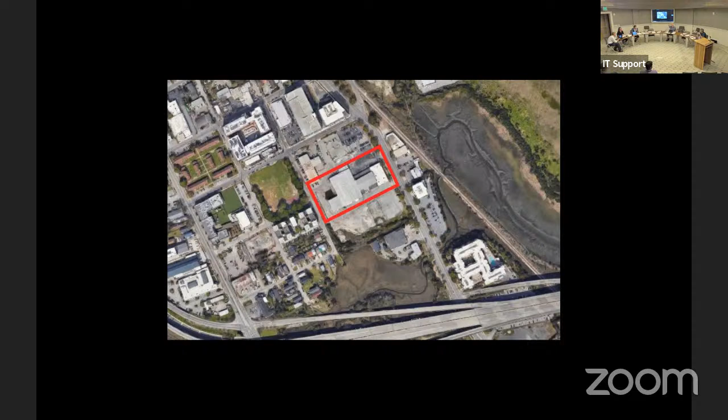And then now we go to the next one. This is the building in question being requested for demolition. And then now we're ready for applicant presentation.

The county owns this building and is proposing to demolish it. It's old and dilapidated, and it's presented all sorts of liability issues and such, so we've decided to remove the building. It's part of a future real estate agreement. That's really all I have for that. It's pretty simple.

All right, thank you. Do we have any public comment? If we do, please come up and state your name for the record. My name is Idris Live. I think it's a good idea and that we need to do it. Thank you. Any other public comment?

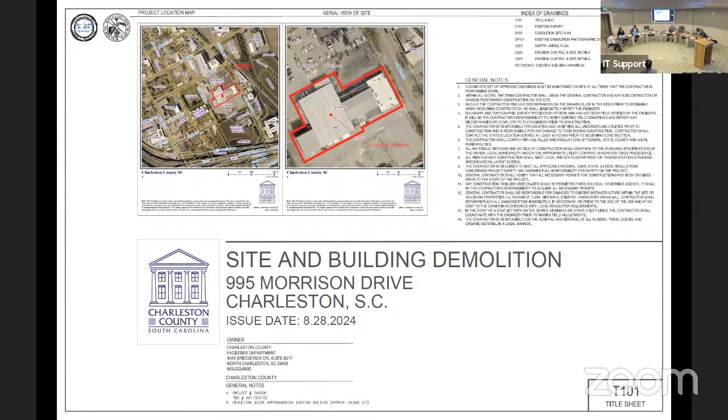All right, great. Staff comments and recommendations. The building is 51 years old and therefore meets the threshold for consideration as a historic building. However, the building is utilitarian in nature and has few, if any, historical, architectural, or aesthetic features. Most recently used as the County of Charleston City Magistrate and Small Claims Court and Hope Center, the building is neither architecturally nor culturally important to the city in any way that provides a compelling reason for its retention. There are no staff conditions for approval, and staff recommendation is for approval of demolition.

Any response from the applicant? All right, thank you. Board discussion. I move for approval. Second. So we have a motion to approve demolition without any conditions. Ready to vote? In favor, aye. All right, thank you very much.

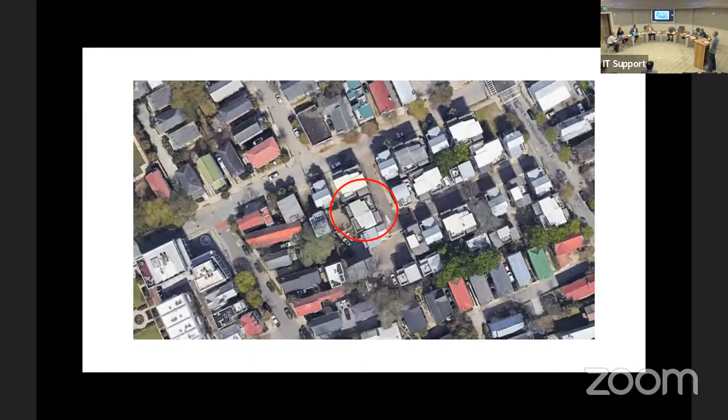My argument with the wooden doors first is they're not affordable. A steel door replacement costs between $2,000 and $3,000, while a wooden door costs between $10,000 and $12,000. Our community mostly consists of rentals for college students, probably 80%, and the owners of those units will do the bare minimum to those properties to make sure they're still collecting rent.

So they're not going to replace a $10,000 to $12,000 garage door, but they might replace a $2,000 door. Another reason is they're just not maintainable. That whole area floods every time there's any kind of rain, so the bottom of those garage doors will be like 2 inches underwater. The third reason is that, according to FEMA, we're not even allowed to have wooden doors in structures that are below the BFE, which is what those garage doors are. The material recommendation for a garage door from FEMA is steel.

So we're violating federal regulations by having wooden doors there. Thank you. Any questions? Did you get a permit for the work? We did this through Home Depot, and they said they were going to get a permit, but they did not get a permit.

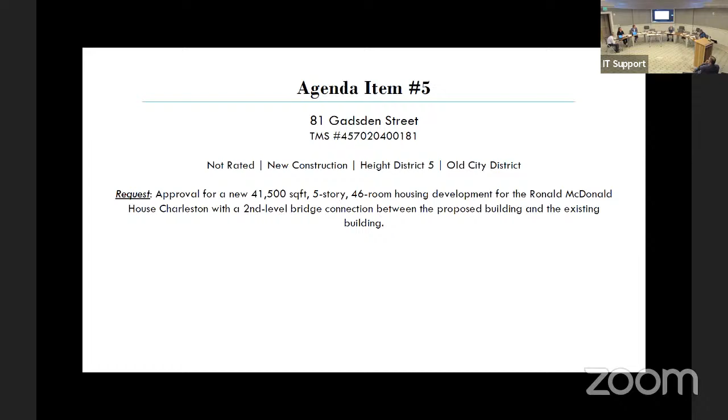All right, we are now at number 5, 81 Gadsden Street. Do you want to introduce it, please? Sure. It's a new construction in the Old City District, and the applicant is requesting approval for a 5-story, 46-room housing development for the Ronald McDonald House Charleston, with a second-level bridge connection between the proposed building and the existing building. This is the location, and then we'll be ready for the applicant presentation.

My name is David Burke with LS3P. We have our client here today. KP just wanted to say something real quick because she wasn't able to be here at the last meeting. So I'd like to introduce the project, and I'd like to go ahead and ask for the extra 10 minutes. Sure, if you want to get through a few items. So this will just reset again. Thank you.

So I'm Kathy KP Papadimitriou. I have the honor of serving as the CEO here in Charleston. The staff are very committed to this. We're all Charlestonians, and we thank you for the guidance you've given us so far. This is probably the largest thing the charity's ever done, and we really appreciate your endorsement. So we want to do it well, we want to do it right, and thank you.

Do I have control or do you? I just always try it, and then if it works, it works. I'll just kind of get through. We'll start with the big picture. I would say last time the message we heard loud and clear was simplify. We had a really good concept, but the execution, I agree, wasn't quite where it should be, and I think we learned that, and we've heeded that. And you'll find that even when the historic groups in the neighborhoods get up and tell you about the responses, they appreciated what you said, and they even offered some of their own thoughts.

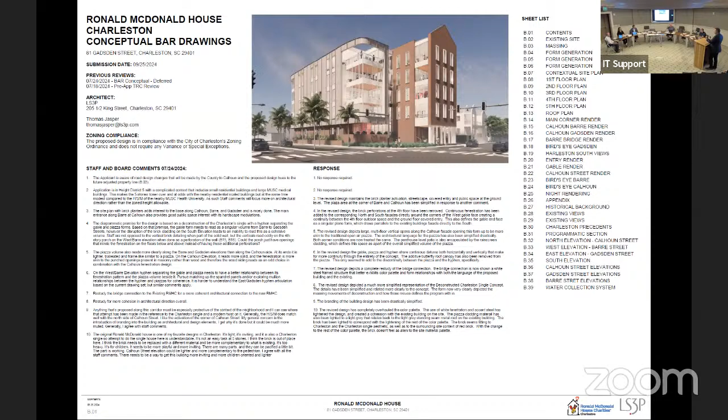Thomas is going to jump up here and tell you a little bit about the specifics. I'm going to touch on some of the big picture and refresh you on where we are.

This was that parti drawing we shared last time. It didn't change very much, other than we think we've done a better job of focusing on the public spaces being in the blue areas. If you think about the Charleston single, the deconstructed Charleston single, you have one bar, which is the main house, and the other bar, which would be the piazza.

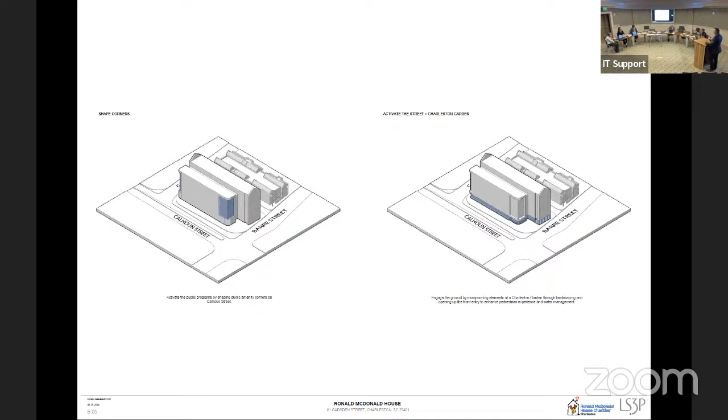Another important feature, we were able to meet with Dominion Energy between the last time we were here and now. The transformer that's powering the existing building is sitting in the drive, in what is going to be the new drive lane. We were all along thinking we would just slide that down closer to the existing building and let that power the existing building, and put a new transformer in a vault in our new building to supply it.

In our meeting with Dominion, they said, why relocate an existing one? We don't like to do that anyway. Let's build one that runs both buildings. So the way to do that is to put it in the area where we were going to put the one to run the existing building. The good news is that takes that transformer vault off of what was a back-of-house corner, and now we don't have that much back of house, so we have a little more flexibility with what we can do with that corner. That's actually turned out to be a very helpful thing.

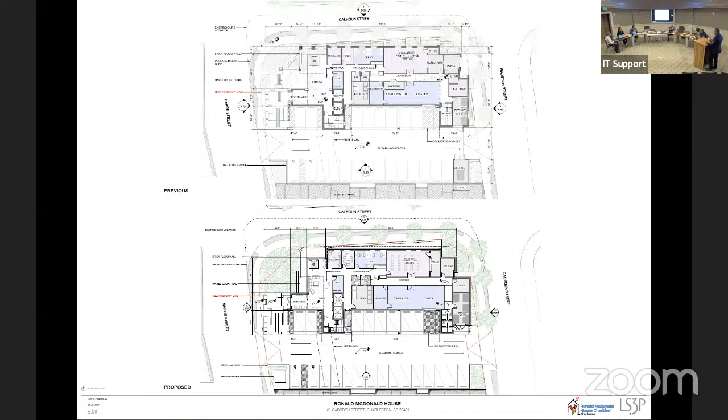There's not a whole lot of major changes on the plans going up the building, so I won't spend too much time on it. The function of every floor has stayed pretty much the same, with the exception of how we've treated the exterior skin. And the roof form, you'll notice the butterfly is gone — we got rid of that. We have two simple forms, one being the main roof and the other being the piazza. So Thomas is going to tell us more.

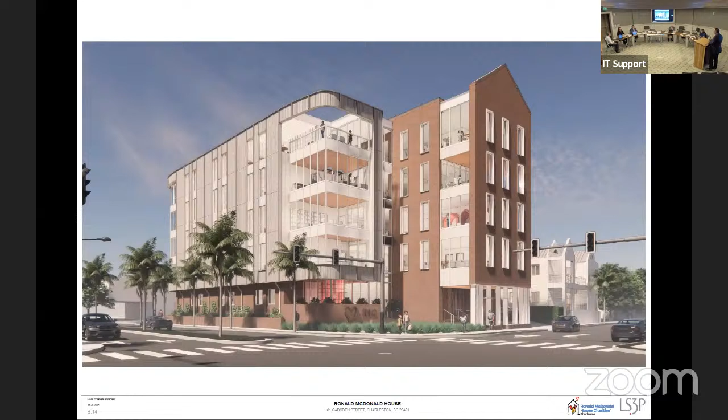I'm Thomas Jasper with LS3P. As David mentioned in the introduction, I think the overarching commentary from board and staff was to simplify the design, simplify both the color palette and the form and massing. So we looked to achieve that through a clear identification of the deconstruction of the Charleston single, which was our overall concept — to cut back on a lot of the ornamental pieces and branding elements that didn't necessarily relate back to the original concept, and to create a more cohesive campus through both color palette and formwork relating back to the existing Ronald McDonald House.

So this shows the change from previous to proposed on that main Barre and Calhoun corner. One thing in simplifying the deconstruction of our Charleston single, we looked to break that down into two big architectural movements: one being the pulling of the piazza off of the gable form and revealing the glassy hyphen that is the projection of the circulation running between the two forms, and then to pull open the gable face at the main entry.

Doing this pull at the main entry created two things. One, it allowed us to create a relationship with the entryway to the south of the existing building. And it also allowed us to relate that fourth floor porch patio space that ownership wanted to the openings below and above.

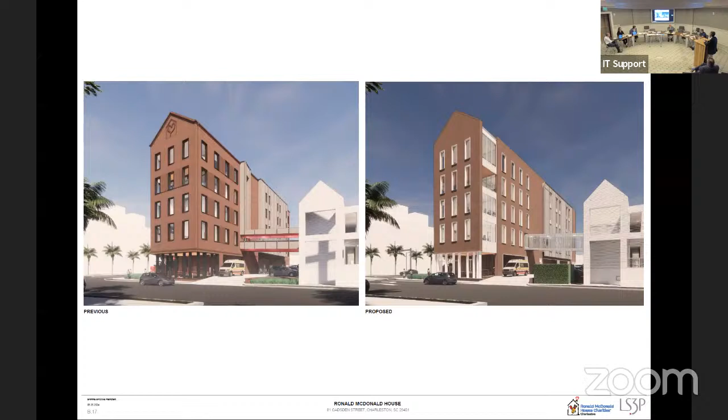In order to answer the board's comments on extending that brick, we pulled this material off the face and made it more of a cladding screen element. We also pulled it down from the parapet and up from below so that the brick can continue through above and below it. We added this rendering to show the relationship this has to the north facade material and how it's piercing that brick form.

At a request of the Harleston Village Neighborhood Association, we added these two renderings, views looking north along Gadsden and Barre, just to understand how the building relates to its neighboring buildings and form.

At the entry, we continue to peel back the brick fenestration or brick detail work, as well as a lot of the kind of ornamental steel.

We moved the folly at the plaza. We cut out some of the more superfluous brick staircases and simplified just the entryway in general.

And the planter wall that runs along Calhoun now wraps that corner and becomes an opportunity for signage below, but also matches the same profile as that of the piazza. So it's reading with those vertical datums and relating to that, as almost a part of that form that's been pulled off of the gable.

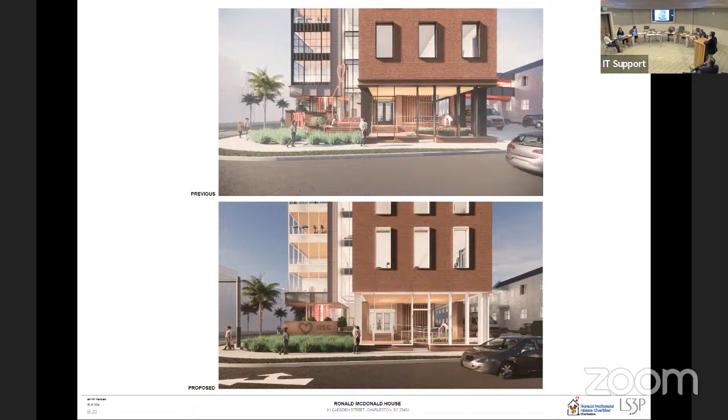We also, in response to the Preservation Society, in order to ground this entry face, we added heavier steel members at the corners, just to give it to carry some of that weight of the facade above.

Moving up that same facade, we removed the perforated brick off of the fourth floor patio space and cut back a lot of the more ornamental detail on that gable rake condition, simplifying and minimalizing those cornices.

The view at Calhoun. One of the positive elements was the planter boxes that we created along Calhoun Street to activate this street. So we maintained those, but simplified them slightly just to relate to the changes in the architecture throughout the rest of the building.

And you'll see we still are planning on keeping the downspout system and gray water retention, but it will now just occur behind that rain screen.

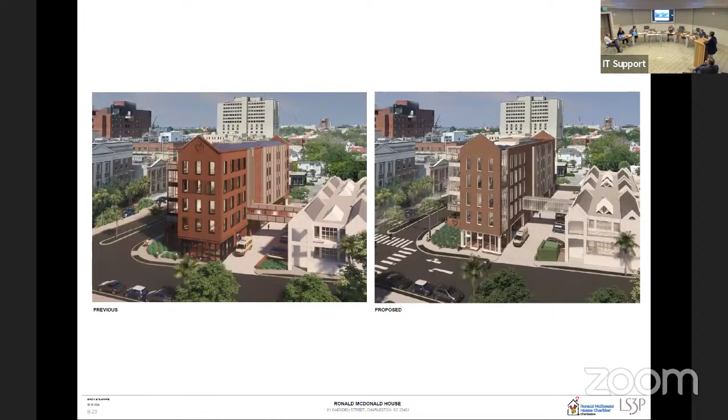View from the southwest, looking on a view of the kind of the main plaza and aerial, and then a night rendering of I think David's going to.

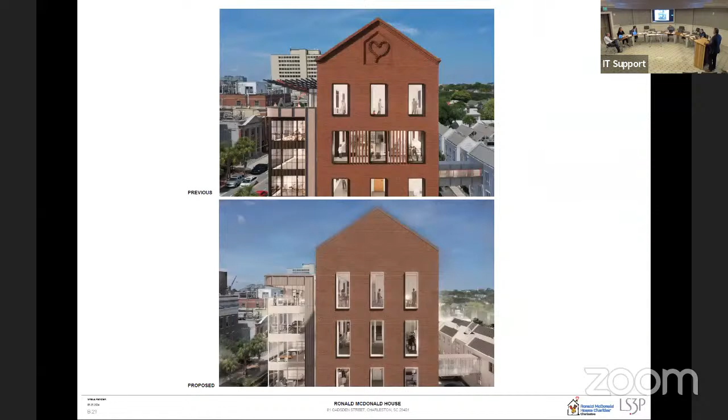I think everything else is just supplemental stuff that you don't necessarily need. So I think we've got everything that you need for the review, so I think we'll just stop there.

Thank you. Yeah, any questions from the board? I do have a couple questions.

You're gonna kill me about this one. No, I wasn't here for the last one, but you set this up to be a piazza and a single house, but you've got a piazza on the north. It just seems, and maybe it's because the lot won't allow you to get everything you want, but it seems like you put the taller part on Calhoun and the smaller part next to the lower buildings, and then the piazza would be on the south.

It's deconstructed. It moved around. Okay, all right. I had to ask. All right, is that your answer? That's fair. Okay, all right, so the next question.

So I see a lot of pink lines in there. What's going on there? Inside the building? In the old one, you had things happening that now we just see it and don't know what it is. So, we did have a lot of red lines before. We were trying to bring in the color of the Ronald McDonald House into some of the pieces. And at our last meeting, we were kind of asked to tone that down a little bit. We can revisit it, but we wanted to just talk about the architecture, not get into branding and all that right now. Some kind of signage or something? Is it neon? What is it? No, let me see if I can. It just, I can't figure out what it is.

Right there, that is a toy closet. And it's part of the story of the Ronald McDonald House. When you come there with your family, you walk in and the first thing they do is allow your child to go pick out a toy out of the toy room. It's usually done in some sort of a way that it's an experience. There's a magic to how you open the lock of the door or something, and it's something that we wanted to celebrate a little bit.

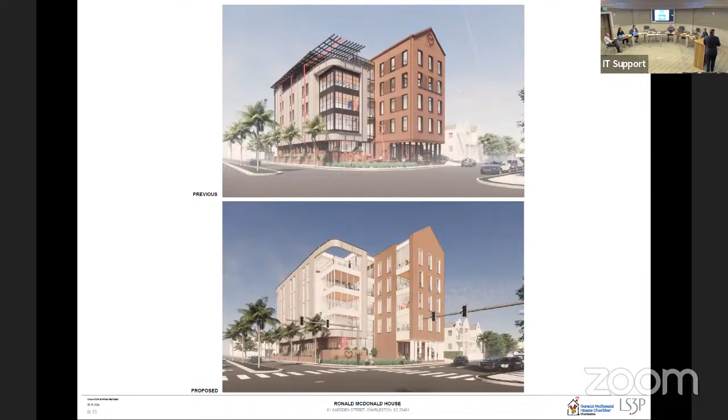Got you, thank you. So, Mr. Chairman, it looks like each one of the floor heights is 12 to 13 feet, that sound right? 12. Well, and you need that much. 12 is flood line, that's where we have to get to. See if I can get to the elevations because we have those.

There we go, it's 13 and a half. Design flood is 13 and a half. That's right there, that's the datum line that we're having to follow.

That's where the bottom of the windows are. Each floor above that is about 12 to 13 feet. From grade to level 2 is 15 feet, and then each one above that is 13, 12 feet. You get to the top, it's a little bit more. At the very top floor, I think we needed an extra foot.

But the question is really for me because it's just a really tall building and it's just part of the design. Is your interior demands the need for 12 feet? Right, 10-foot ceiling, that's what we're needing to get all the mechanical equipment and stuff we need in the building.

Yep, thanks so much. Just a comment from me. I think staff has said this, but there were questions. I just wanted to point out, I believe, well, you hadn't even talked about this yet. Sorry, I'm ahead of myself. It's a clarifying question.

Can you make it smaller, so that you can see the whole thing? It's so small you can't see it at all. How about that, does that work for you? It's a little delayed - what you are seeing is the frame, let me back up a couple more slides here. There is a roof plan that is easier to see.

Actually, that one's good. We're trying to capture as much of the mechanical equipment as we can in that space. These are actually solar panels, but they're to heat the water - they're not creating electricity, they're just heating the water. So that's our strategy. It may push and pull as we put equipment in there, but we're trying to hide it as much into the building as we can.

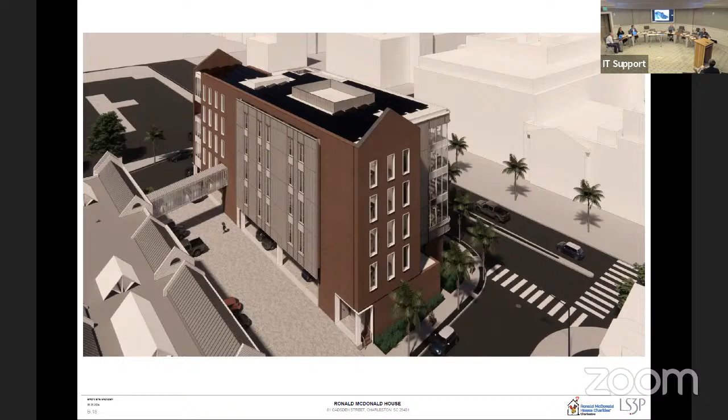And we've also been directed by the fire marshal that in the flood zone now, we can't have things like fire pumps and stuff like that. So the reason we need some of the height here is that we're actually going to put the fire pump on a pedestal underneath. It's not there - it's actually there, but I don't have a page number, it's the one that shows the streetscapes - the Calhoun Street proposed project.

Is it a black and white drawing? Yeah, it's this one right here. Okay, I get it.

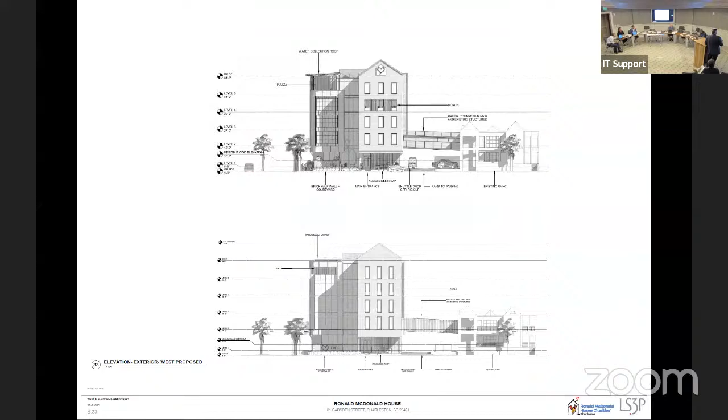This one? Yeah, that's it.

It's not on the table right now, but if you look at that top where Calhoun Street is, and then this project, and then you look to the left, it really is a significant height. I appreciate you putting this in there because that's an accurate reflection of how it really is. It balances off on the north side. I get it, but then you see them jumping across Calhoun. If you think about that round and down, that's that little white on the left. We built the study model so you really could see it in its context. It's more three-dimensional here, and I think that helps too.

Eddie, look at the model. They put a lot of time into the model. Stand up, come around to the front. They brought models in. That's scaling, yeah, across the street.

That's why it's one. When I was looking at that, this is just an exact illustration of that, or vice versa. So you do this, and that's the first building you get. You want it to be on the other side of Calhoun Street, and it's not. It's just what it is.

Thank you. Yep. All right, thank you.

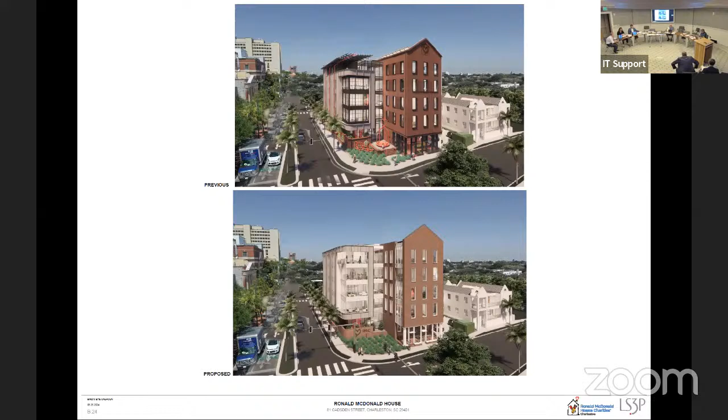Before we start the next one, we'll let them. Wait, Hey David, you gotta take your model, because we got other applicants. We forgot all about it. There's another applicant that's gonna give a presentation, and they can't stay here during that. I can take them briefly. Hold on, I'm just gonna put it behind that lectern.

That's great, thank you, Debbie.

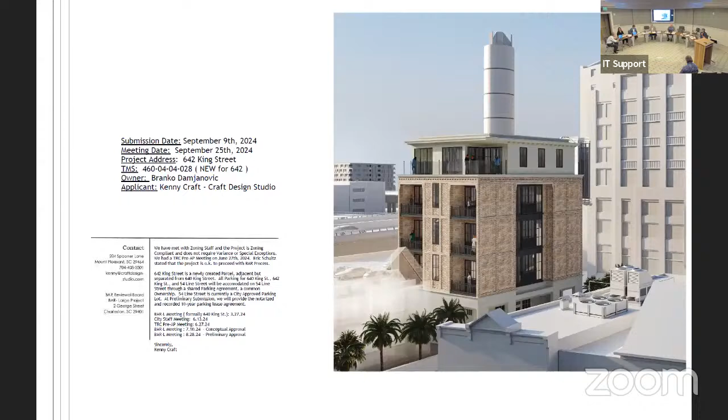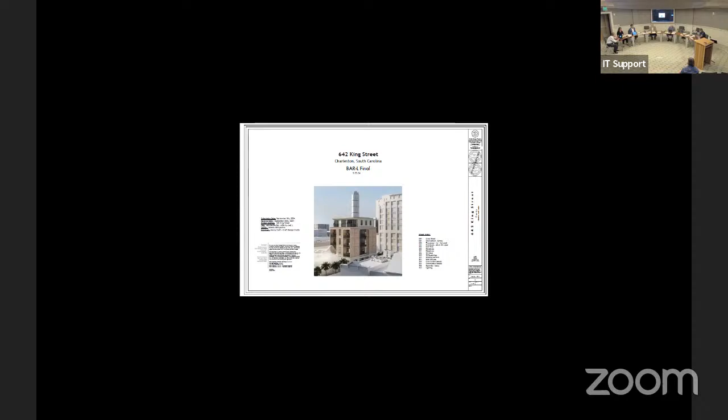Welcome back. All right, we are now to item number 6, which is 642 King Street, here for final approval. Item number 6, 642 King Street, is new construction in the Old and Historic District, requesting final approval for a new 5-story building.

You have to go back one just so we can see. There we go, and this is the location of 642. Now we're ready for the applicant presentation, Mr.

And I know you have things to hand out, so you can do that first if you'd like. Okay.

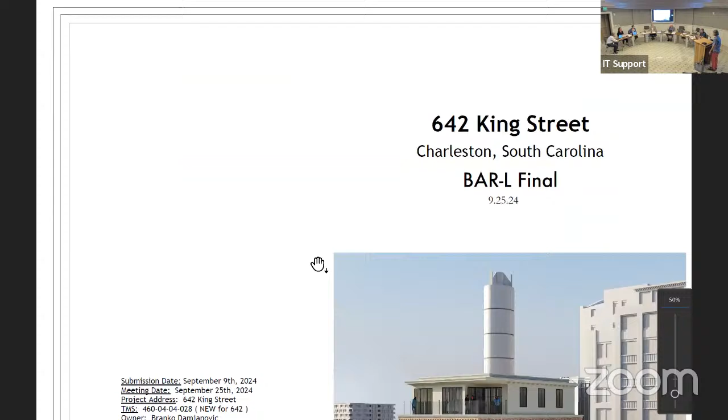Kenny Craft, architect, Craft Design Studio, and yes, I have some material samples. I'll go ahead and pass it around. Start on one end.

All right, we've gone through conceptual and preliminary, and we're at final, so I'll skip ahead on most of this and get into the details. Context on the site.

Might stop here for a moment on the elevations. Exterior material-wise, starting from the base, we have brick with stucco that will be painted this alabaster cream color, which also matches the aluminum clad color at the top. The brick in the middle, this magnolia bay, is kind of a buff color, and we've chosen a grout that's a lighter color which makes the brick more uniform and consistent. The windows are a dark battleship gray window clad color.

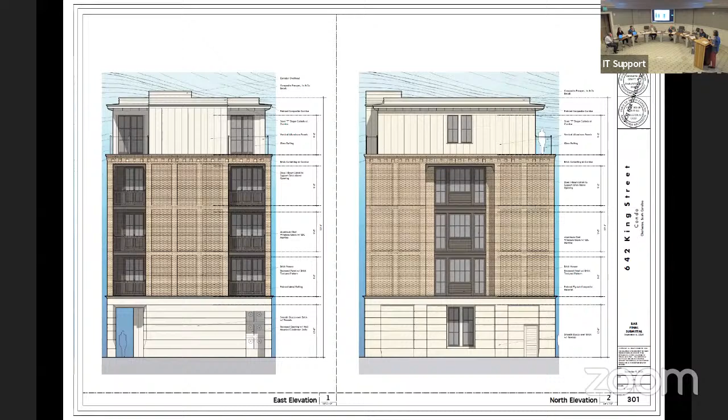Some of the materials I'm passing around are this fly ash composite material used for details, particularly the cornice, matching the same color as the aluminum cladding. Some of the blow-up details show a fair amount of brick corbelling as it transitions to the penthouse level at the top.

Rendered view, building section, cutting through the balcony side and then a regular wall side, then a recessed lower level. The cornice and penthouse level have vertical aluminum panels in this alabaster cut, and at the cornice there's a T-shaped steel purlin detail, also all in this same alabaster color. The cornice is made of this fly ash material, which is great low maintenance but also allows for a bit of detail, all consistent in color with the aluminum cladding.

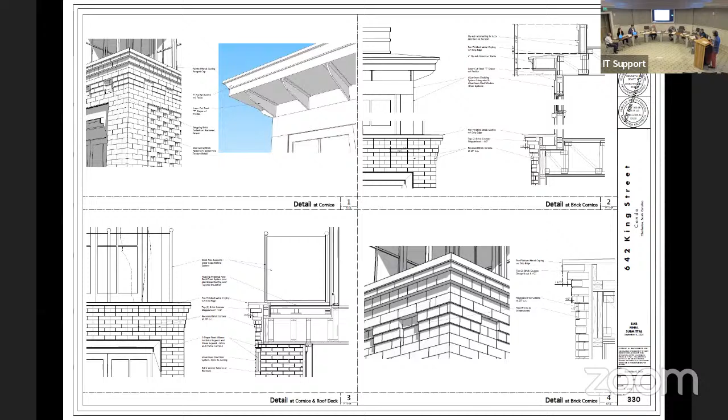Getting into this detail with the brick, there are some good shadow lines on the brick, speaking to Charleston's brick heritage, with fields, zones where we have an alternating brick pattern with shadow lines. This shows the magnolia bay buff color, mostly whitish but with some warmer tones, and the grout color picks up the lighter shade so it looks more uniform and consistent without a lot of busyness.

Some of the aluminum cladding details have nice recessed groove lines that allow you to turn the corner nicely without a bunch of joints and fussiness. Not too complicated on the window or light fixtures, just nice simple pendants—sorry, sconces—at the balcony locations and along the bottom.

And again, the samples are being passed around, so take a look. I'm personally pretty excited about this fly ash material—low maintenance and allows for a couple of details without actually using wood, with nice color matching to the aluminum. Open to any questions or comments.

How does the top floor roof deck system drain? Is it coming inside? Good question—it's all internal.

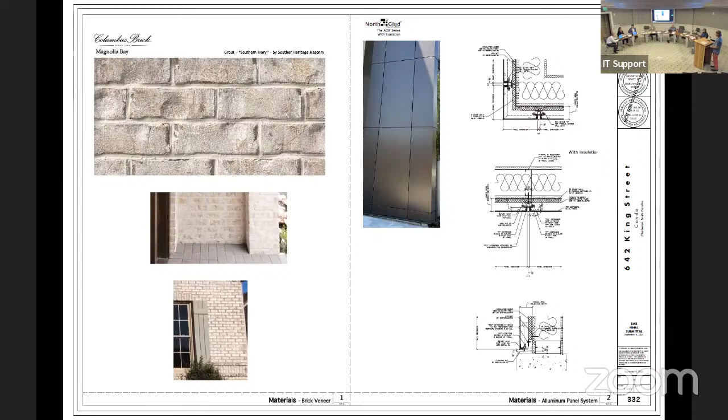The applicant has provided wall sections detailing brick and metal work related to construction of the building in general and the upper floor penthouse specifically, as requested by the board during the previous review in August. We have no issues with anything shown to us, so staff conditions for approval are the more traditional boilerplate ones. Condition number 1: any modifications to approved drawings required for code or fire department compliance, or contemplated during construction, must be approved by the BAR prior to undertaking changes. Any modifications or substitutions to materials or elements approved at the final BAR hearing must be specifically noted, reviewed, and approved on the mock-up sample panel. Number 2: deviations from previously approved submissions, if determined by BAR staff during or after completion of construction to be a downgrade of the quality of the project and inconsistent with previous approvals, are not approved, whether noted or not by staff during review of the permit drawings. Staff recommendation is for final approval with board and staff conditions.

Thank you. Any response? All right, great. Moving into board discussion.

Well, I'll start. I think, and it's nice for me to actually see a project more than once because I'm only here once in a while - I think the details are great and really well done. I wasn't here for the first review, but I think you've done a great job with the development, and it's nice to see things figured out like this.

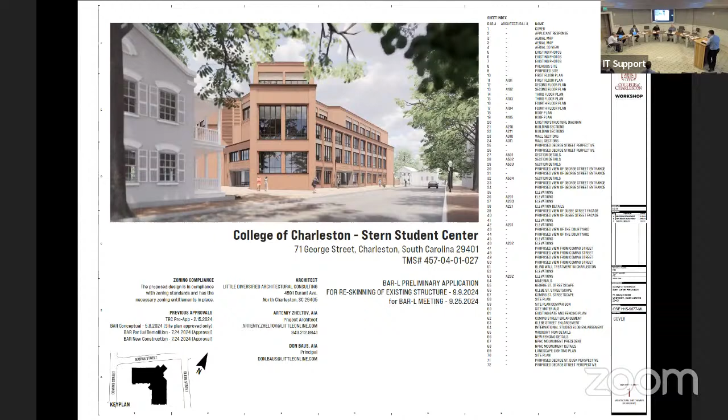We're excited to share the further details of our design, and we hope this will be a dynamic, active hub at the center of the campus, for the staff and local community. Last time we presented for conceptual, we did not receive a lot of comments, but I will go more into detail on how we addressed the comments we did receive further in the application. To catch everybody up, Mr. Matters and Mr. Watkins were not here at the last presentation, so I'll walk through the floor plans and the site.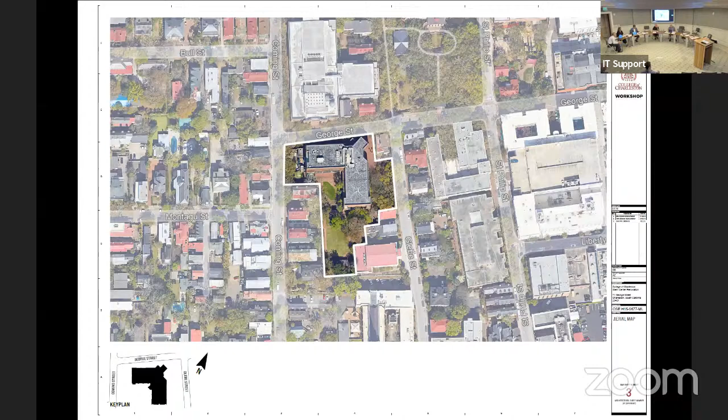It's located at the center of campus, diagonally across from the cistern, with George Street to the north, Coming Street to the west, and Glebe Street to the east of the building. From this area, you can see Grace Church down to the south, the Harleston Village neighborhood, and then the larger College of Charleston building at the heart of the campus.

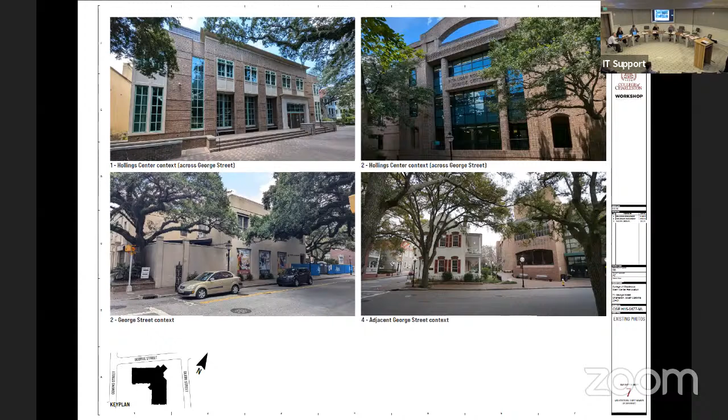These are existing pictures of the building as it sits now. These were views from George Street, the Coming Street facade, the Glebe Street facade, and this is just context of the site. These two buildings are directly across the street: the Hollings Center, which is the original building built in the 70s, and then the Hollings Center addition which was added about 5-6 years ago.

Scott Parker will talk a little more about the details of the site, so I'll breeze through it — there wasn't a lot of change there. In terms of the floor plan, it hasn't changed much either, so I'll go through it.

The existing building currently houses a pool, so we're filling in the pool with a multi-purpose room, a double-story multi-purpose room. There are two restaurants and a dining area for the students on the ground floor, which spills out to the south onto the green. These are construction documents for the current application, but there weren't any changes.

The second floor houses student government organizations and meeting rooms, and down on the south wing there is the double-story multi-purpose room. The third floor will house the fitness center for the college — again, no major changes in the floor plan program. The fourth floor will house the admin suite and a larger ballroom-type space for student gatherings, and again no changes.

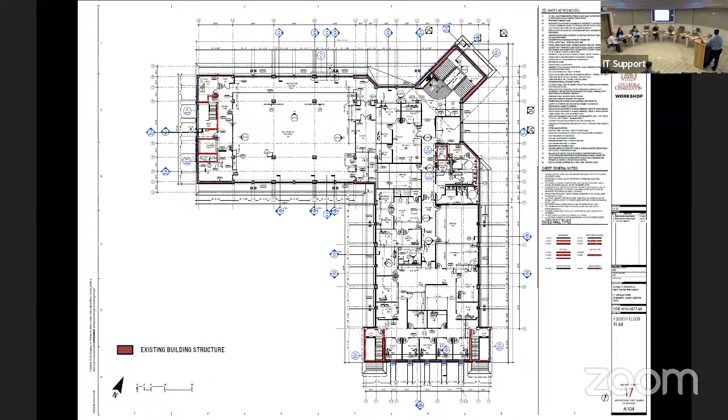These two building sections show the extent of the reskinning effort. As you can see, a lot of the exterior is being added — 99% of it is new, with just the building structure remaining.

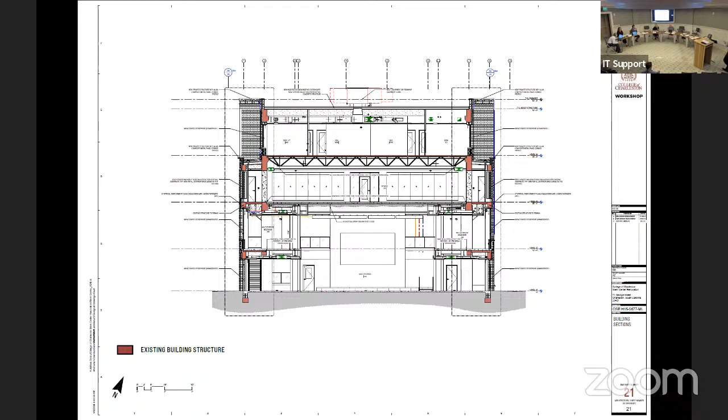Wall sections: typical around this building, we have the fourth floor stepping back from the street facade. We're adding a consistent parapet at the third level that helps with draining that roof and creates a nice architectural feature. Also, different from the conceptual application, we reduced the parapet at the fourth level by 16 inches, so the building is actually shorter.

This wall section shows the sloped glazing — that is the only location where we're keeping the original form, the original glazing of the original building. The glazing itself is not original, but the form of it is.

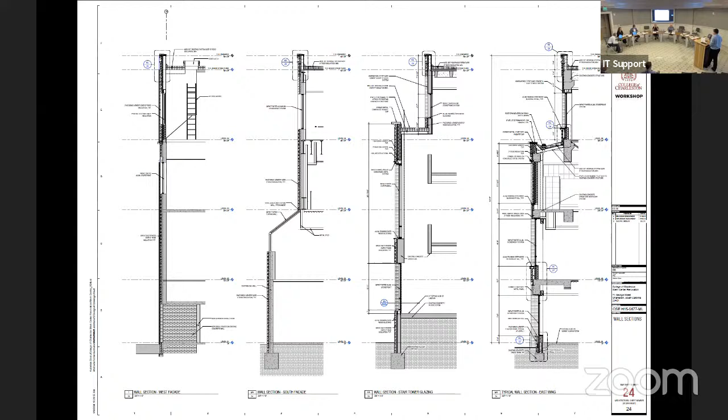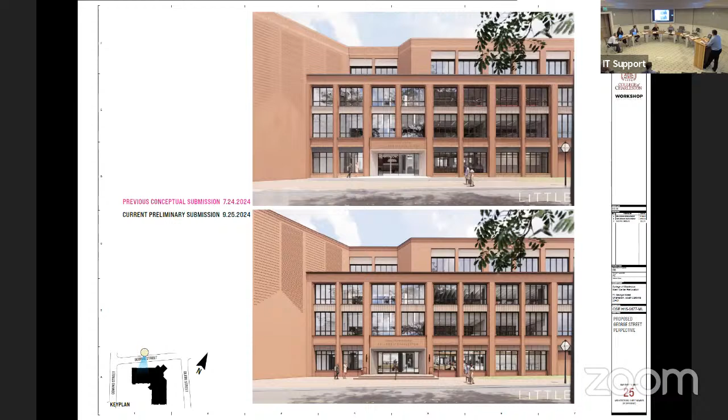Now let's go through the previous and current renderings. For comparison purposes, we haven't made a lot of changes, but the major change is that the board requested a stronger base. We studied breaking up these verticals with a stronger horizontal, but to keep the vertical proportions we decided against it. You'll see in the closer details where we're keeping the header course just a step away from the vertical plane. We also added vertical reveals into the spandrel panels on the ground floor and changed the color so that the ground floor reads taller.

And then lastly, on this facade, you see we changed the detailing at the fourth floor parapet. The next three slides go through the details of the typical bay.

This is the ground floor window. You can see the aluminum composite panels. That's where we added the vertical reveals.

Between the second and third floor, one change in materials, a conceptual application in this spandrel area between the second and third floor showed GFRC panels. We will replace it with fiber cement planks, rain screen.

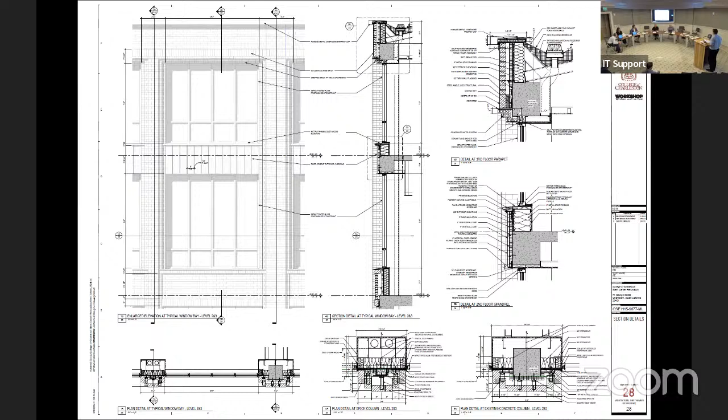And then the fourth floor, it's the same. We have a window in the existing opening and then a stucco spandrel panel.

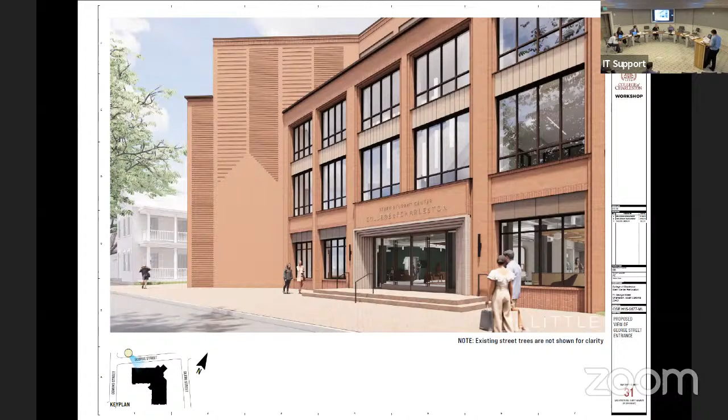Again, these are details of the entrance, the brick stepping back, and then the core bolt header to the door with a concealed lintel system holding up the brick attached to the existing structure.

Similar application, no major changes on the George Street facade tower, stair tower, just some further brick detailing. This is a George Street elevation.

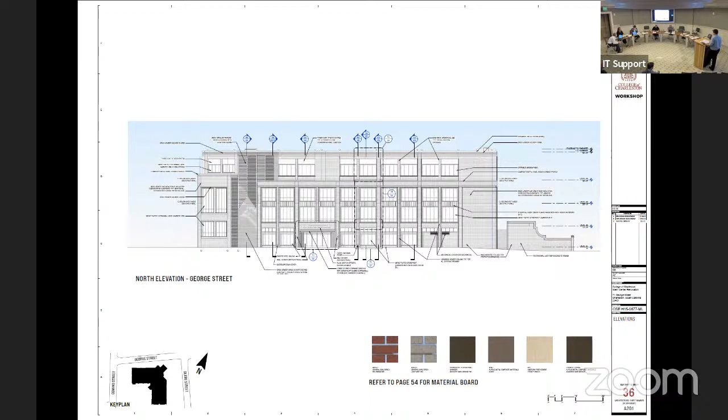I'll talk more about the materials in our when the material palette slide comes up. And then this is a George Street tower elevations. And then we're showing the brick detailing.

This further helps to explain how we're making the pattern. It's a half inch reveal in the pattern shown of the brick courses, alternating courses.

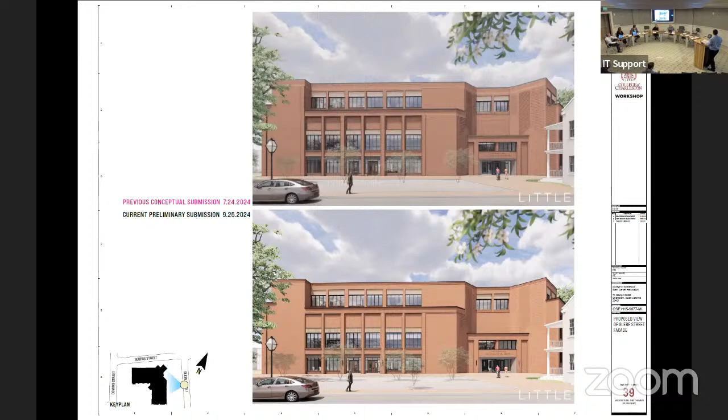Glebe Street facade, it's all, again, all the same changes that we did to the typical bay. Minor change at the ground level, change to the composite panel, additional vertical reveals, and then detailing at the fourth parapet.

Elevations. And then this view you can see from the street, but it's the rear of the building, south facade, the green. This is where the multi-purpose room spills out onto the green. You can see all the new additional glazing at the ground level.

And again, it's the same changes that we've done to a typical bay. That's a view from Coming Street.

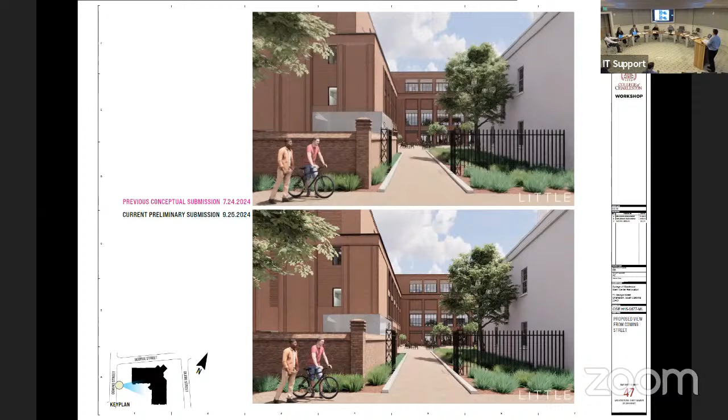Scott will talk a little more about it, but we shifted this wall, back of house wall. You can't see it in the rendering, but we shifted it back by about 16 inches, so it's a wider walkway.

And lastly, this was the elevation that gave us the most trouble, and we received the most comments. The comments I received from the staff and the board were regarding this elevation.

Unfortunately, there are some programmatic elements that are locked on the floor plan. We tried to address the staff comments by adding additional glazing. You can see additional windows at the fourth level, or the larger windows at the stair tower.

But due to programmatic elements, we weren't able to add modulation to the facade. The only modulation is the brick detailing, the brick piers that are recessed.

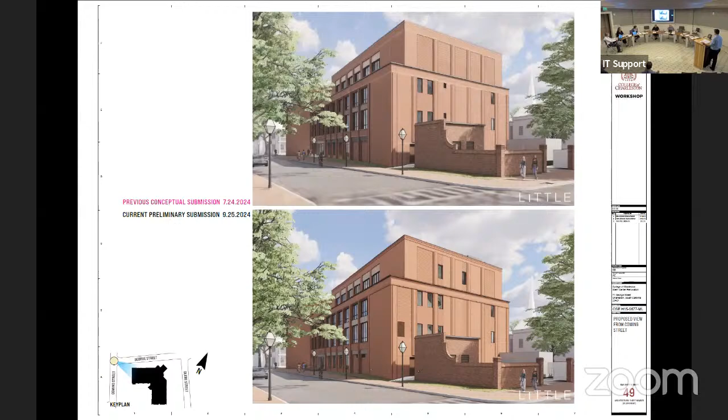Again, that's a view of the Coming Street facade, the west facade. And the way we're treating it is not really typical to the way it's been treated through different historic areas in Charleston.

This is the south facade. And then the material palette, we have real samples, but you can see it on the screen.

This is that fiber cement planks. They got variation from plank to plank, so it will give it a patina look, a glass, and then dark bronze

anodized aluminum glazing. And then that's the composite panel that's at the ground level, the suede. And then these are the sconces that are shown in the render at each entrance.

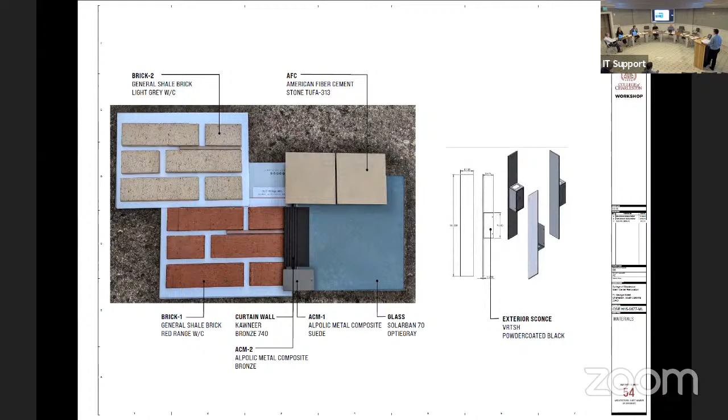These are just streetscapes, in case you all had any questions on fencing. And then I'm going to let Scott Parker talk about the site.

Thank you, Scott Parker with Design Works. So, before and after, the slide on the left is what you saw the last time we were here. Slide on the right, a few minor changes that are being made.

We're proposing some additional planting along the Glebe Street edge, and additional planting in the courtyard here. And what I really want you all to focus on and get your feedback on is dealing with one of

the programmatic elements, which is that this space has to be fenced, and the college needs to be able to control the boundary when they have certain events there. So the entire perimeter needs an operable fence and gates.

What we're looking at is two really key points, one on Coming Street, where there is a beautiful historic gate. Artemi mentioned that we're having to extend the service area in the back further to the south, so we've pushed back a little bit so that we can preserve most of the gate and fencing in that location. But there's a section of it that has to come out.

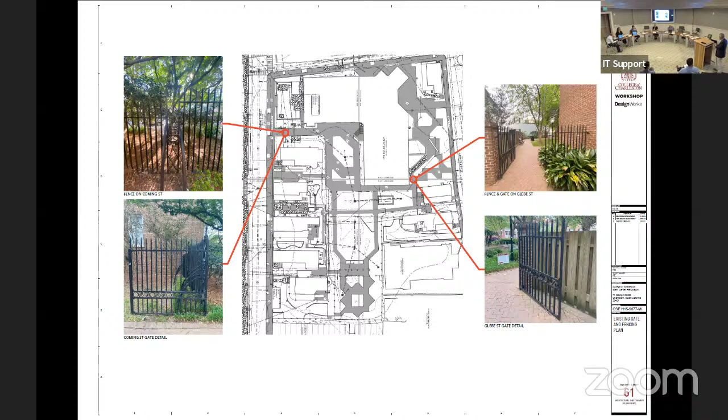We're proposing to relocate that section to an entrance point on the Glebe Street side. Here's Coming Street - the fence used to extend all the way to that location. What we're doing is taking that last section and relocating it over here, but this entire piece, including the existing gate, will stay in its exact same location going forward. I know it's not ideal, but we have a history of relocating really great ironwork in other places within the city, so that's what we're proposing to do.

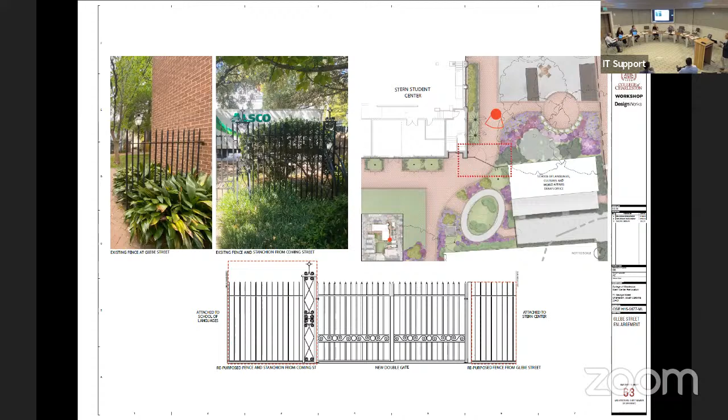At the entrance to Glebe, there is a gate there today, but it needs to be widened so vehicles can move through. So we're going to reuse the piece from Coming Street and attach it to the historic home, and then we're going to have a new gateway there that has two arms that swing, reusing a piece of the gate that's already there. I know it sounds a little convoluted, but that's what we're hoping will win the day.

This is showing the existing gate in that location will move a little further to the south and will be used to close the perimeter to one of the college-owned historic homes there, creating a transition to the large green space and then a smaller private garden for that building. So those are the details of how the gates will occur and what they'll look like.

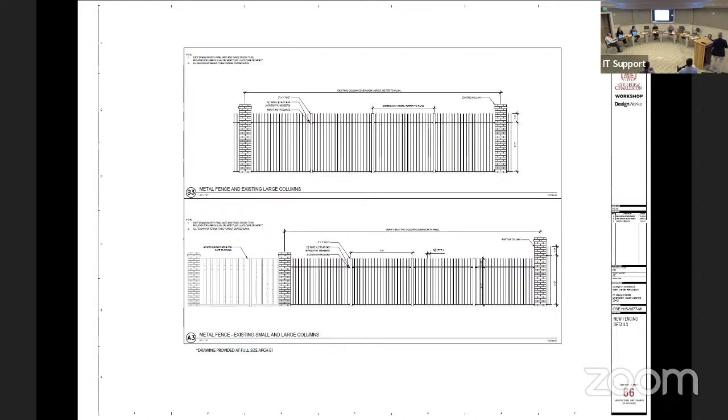On the back side, where the large green is, there's a series of sorority houses, and there's a fence there made of brick piers and wood infill. We're going to take the wood out, take out every other brick pier, and replace that with metal fencing, which will allow some visibility between the sorority houses and the large green space. You can see what the wood fencing looks like now.

The other big change is that previously we had indicated a location for a monument to the historic Black sororities and fraternities that exist on campus, and the college is now able to move forward with that. We met with the students and representatives of those organizations, and their desire is to follow a standard form of these monuments that is being built on other campuses around the country, so they want to be consistent with that. This is an image of what they want to see happen, and so we're following that.

The way we're making it fit within Charleston and within campus is the materials we're using. We're going to use the historic brick, bluestone as the top for the seating, and then cast stone as the top where the different sororities and fraternities will be indicated.

The next and last drawing is really a lighting plan. The college has a very standard light pole that they use on the streets as well as in their interior spaces. The ones in blue exist today and the ones in red are proposed, and it's simply the same light fixture brought into that interior space.

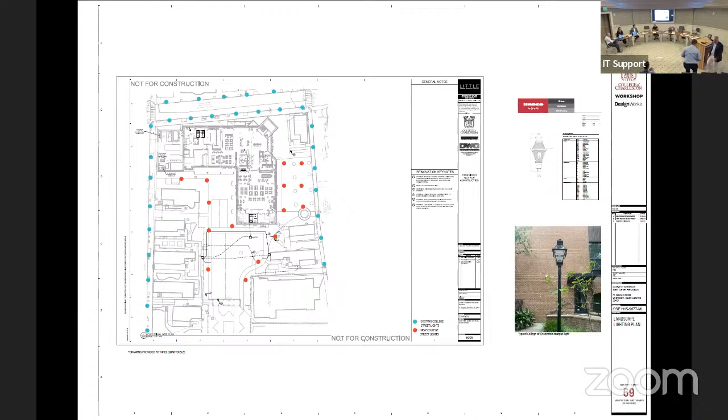Thank you. Thanks, Scott.

To wrap this up, we're excited about the potential of this project and look forward to your insights and feedback, and we hope you grant us preliminary approval. Thank you. Is there any public comment on this project?

Questions? Or questions from the board? Excuse me, I'm sorry, I need to cut you guys off. Any of the new fencing, maybe anything that you're bringing new, is it going to be iron, so there's no aluminum? When you answer, go back to the podium, so the people watching at home - you've got a big crowd viewing audience at home.

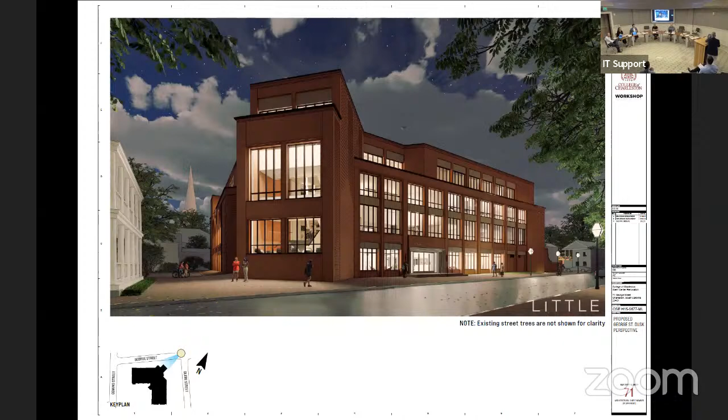Right, so actually, the fencing that will occur along this edge here, the metal fencing, is proposed to be aluminum - just a cost issue. Yes.

Any other questions? The George Street Tower rendering - was it just the rendering that differed between the prior submission and the current submission? It reads differently, but it's just the way the glass was rendered. Nothing actually changed about it.

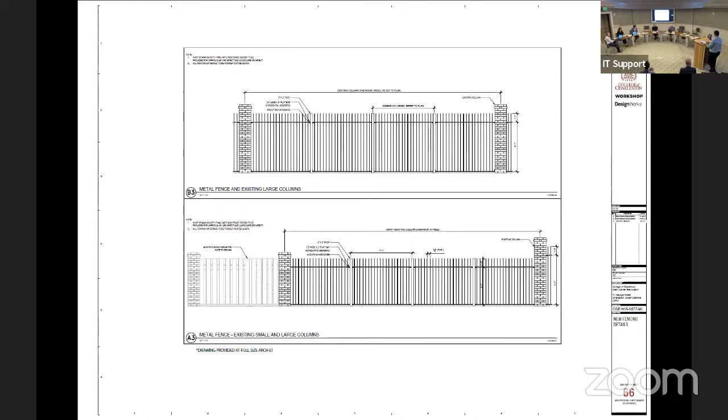Any other questions? All right, thank you so much. Now we can move into public comment. Is there any public comment?

All right, those recommendations. The site plan received conceptual approval by the board on 8 May 2024. There were no board or staff conditions attached to this approval. Staff approve of repurposing and relocation of existing fencing.

I'll note here - Scott, I must have misread, I thought the new proposed fencing was wrought iron. The rest of my comments were related to assuming the new proposal was wrought iron, so it is, with the exception of that one element - that edge along the back. When I was looking at annotations, I was seeing wrought iron everywhere, so it's just that one element.

I'm sure the board will have discussion about that, but any of the wrought iron fencing should have welded joints and concealed fasteners when detailed at final review and constructed.

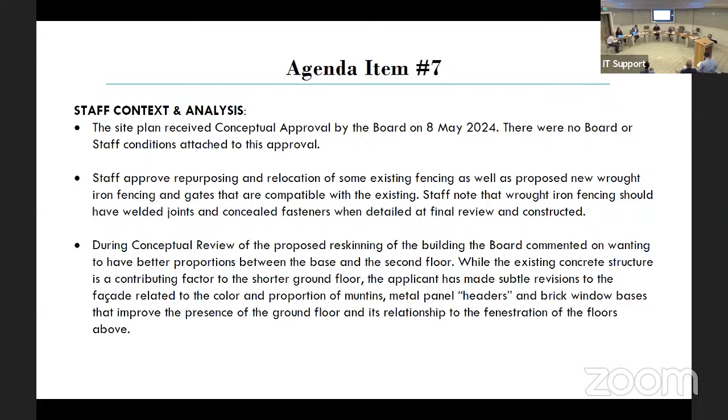Now moving to the building, during conceptual review of the proposed reskinning of the building, the board commented on wanting better proportions between the base and the second floor. While the existing concrete structure is a contributing factor to the shorter ground floor, the applicant has made subtle revisions to the facade related to the color and proportion of the muntins, metal panel headers, and brick window bases that improve the presence of the ground floor and its relationship to the fenestration of the floors above.

The applicant also revisited the elevation at the corner of George and Coming Street as directed by both board and staff. The original building did not acknowledge the prominence of this facade's position at George and Coming, and the applicant has inherited back of house program, which is dictating the necessity of blank wall area. The continued attempts to work around back of house elements and provide fenestration as requested is noted, but in this iteration does not result in a well-composed facade.

Given the program challenges and plan, staff would rather see a well-composed blank facade with interesting brickwork and pier articulation borrowed from the main facade than random patterns of windows. Staff recommend another restudy of this facade that follows applicant's own precedents of 44 George Street and 61 State Street.

Staff approved the material board shown on sheet 54. Staff conditions for approval: restudy of the elevation at the corner of George and Coming Street for a well-composed facade with brickwork and pier articulation in the blank wall. Staff recommendation is for preliminary approval with board and staff conditions and final review by staff.

Thank you. Any response from any of y'all to these comments? Yeah, I did have a response. We really appreciate staff's time and direction and guiding us through the process. And as mentioned earlier, we of course don't have any objection working with the staff on that rear side. Great, thank you so much.

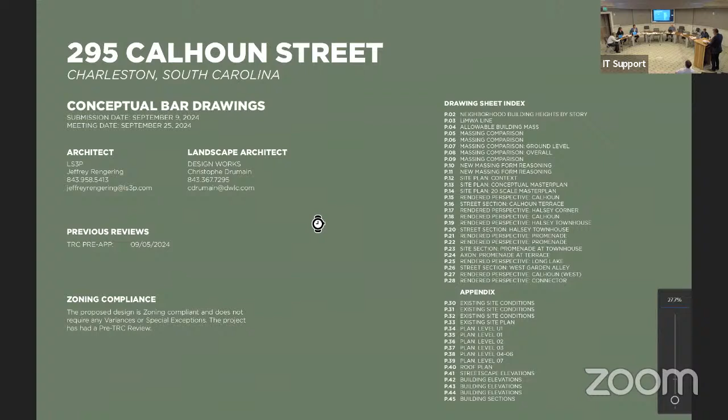My name is David Burt with LS3P. Do you want more than just the 10 minutes? Absolutely. Actually, it's great if we could get it done in 10 minutes. We'll start there and we'll see what else.

So y'all are familiar with this property, all too familiar. We've seen the negative feedback. Southeastern reached out to us and we took on this project for them. It's a challenging project, we know that, but we feel like we've given a really good attempt here.

When meeting with them, we said, look, we'll take on this project under the condition that we are able to use the design principles of Charleston architecture, reducing larger scale buildings into smaller multiple masses. We agreed that the process had to follow the expectations of the community, meaning we would visit with all the historic groups, the neighbors, and we would listen to them. They did everything we asked, and they should be commended for accepting all the extra work it will take to build this structure compared to the previous design.

We started with an inside-out redesign of parking and the desire to make a single building appear as multiple. This reduces the scale and gets more residentially scaled masses. I want to state that this has been an iterative process. We've been through 7 or 8 different versions, and it's been almost a year and a half that we've been working with them on it. So it's not like we just took the last design and started fiddling with it - we started over multiple times. So Jeffrey and team are going to tell you about the rest of the actual design.

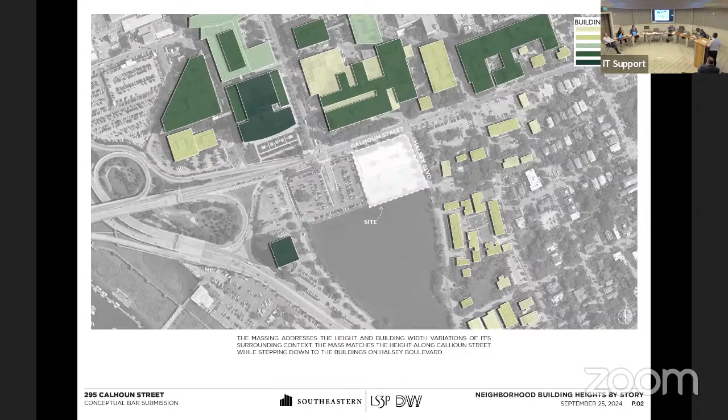Another thing that came on, I think recently after we got involved, was the LiMWA - the adoption of the city's regulation of the LiMWA, and the coastal V zone that kicks in. So everything south of that LiMWA has to be breakaway material below DFE. Everything to the north can be, as we typically do here in Charleston, floodproofing protection.

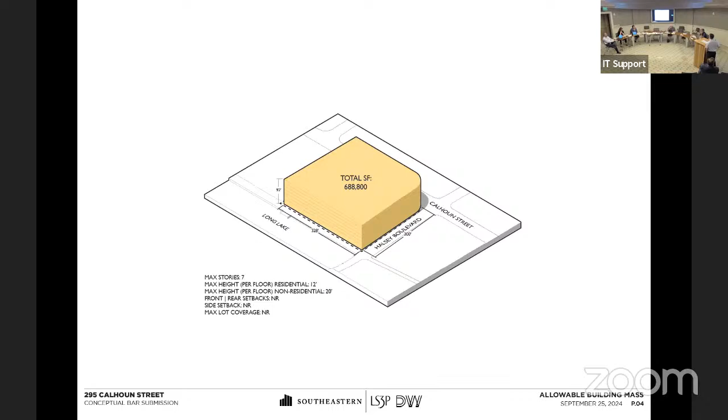Just skipping over this real quick, obviously this is what we're allowed - 7 stories, kind of a mess. Obviously we're carving a lot out of that. So the big thing that we started with, as David alluded to, we had a parking issue, right? The parking was driving this project previously, the previous massing, which you can kind of see the 2 comparisons on that model up there. So we needed to address that first and foremost.

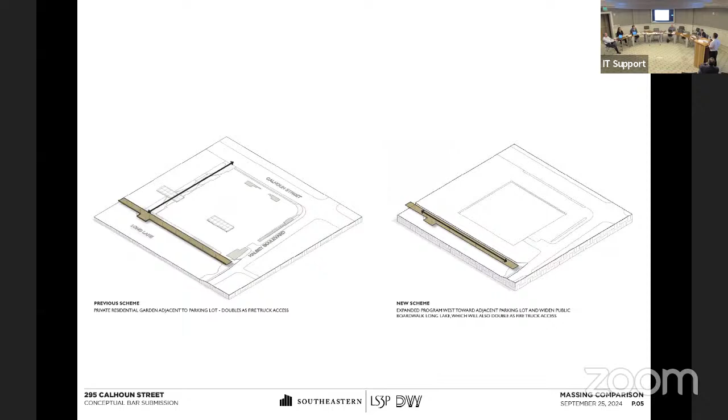So the first thing we did was actually relocate the garden on the west side to the south. So that became our fire access, and that allowed us to widen the parking, but also shrink it. So they had 6 levels before, we're now at 3 levels. That allows us to open the building a lot closer to the ground, right? Get that scale of the building down significantly.

Then we took that, the parking mass, the 3 stories of parking mass, and wrapped it with program. As I said before, the LiMWA really made us rework the program. So what was before retail at the Long Lake and the Promenade had to get moved up to Calhoun Street, which is more appropriate for the urban context it is.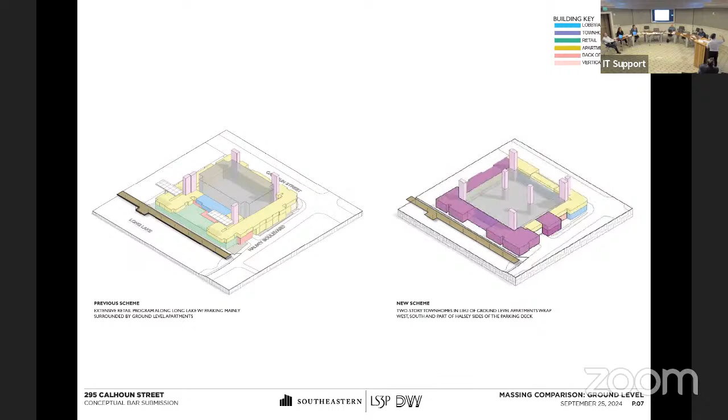And we were able to bring residential, where residential wants to be next to the neighborhood. So that's the purple that you see on the right-hand side. Left is the previous scheme, the right is the new scheme.

And then kind of extruding up from there, which we'll dive into further, but this one really describes what we did, right? We turned a Texas donut into kind of two E's, or as BD mentioned once, a really fancy H-shaped building, so everything is facing outward.

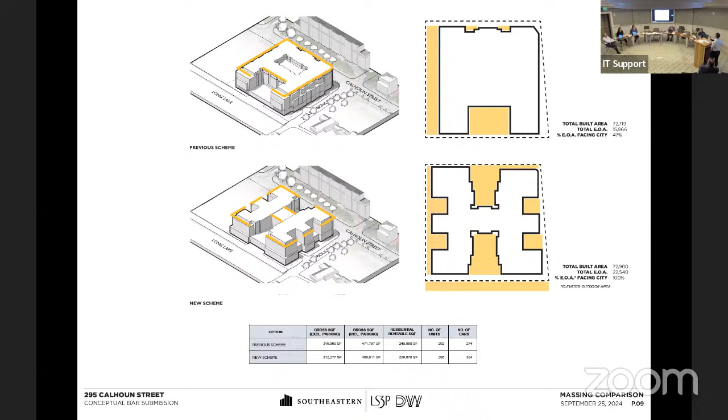So we went from about 47% of the raised area of the previous massing that would face the city to 100%, right? So we'll dive into how we carved that up, but we lost about 8,000 square feet or so, about the same amount of units, because we lost some retail of that program. So actually we gained units back, which was helpful to the client to achieve this new look.

And so diving into the new massing, again, start with parking. We wanted to make sure parking worked for us this time. We wrapped that parking to respond to the urban edge, right? So, as typical Charleston, we bring our buildings out to property lines and make them parallel. So we did that on Calhoun and Halsey.

And then we started carving that ground floor program up. So we carved mainly on the north and south. We created these deep recesses of garden areas that you can see. One would face Long Lake, one would face Calhoun.

And then above that, we extruded up 6 stories, well, I guess 5 stories of apartments, right? So the green you see is how we started setting that back, really emphasizing the lower mass of the townhouse, which is all townhomes, which we'll dive into a little bit more in the renderings.

And then step 5, we wanted to further reduce the scale of the building, the height of the building, so we set back the top floor. So all those units now have a nice generous terrace, but that also reduces the overall appearance of the height.

And then 6, the last thing we did was take those gardens that we had in the north and south, and wrap them all the way through the building, so it feels like one continuous garden that connects Calhoun all the way to Long Lake.

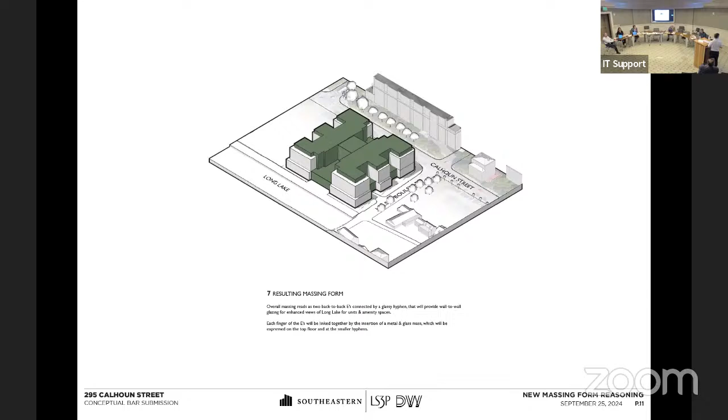And this is kind of the resultant mass, right? You've got these 2 E's facing out towards the city with vertical proportions and massing, with a hyphen, which is in the green, tying all that together.

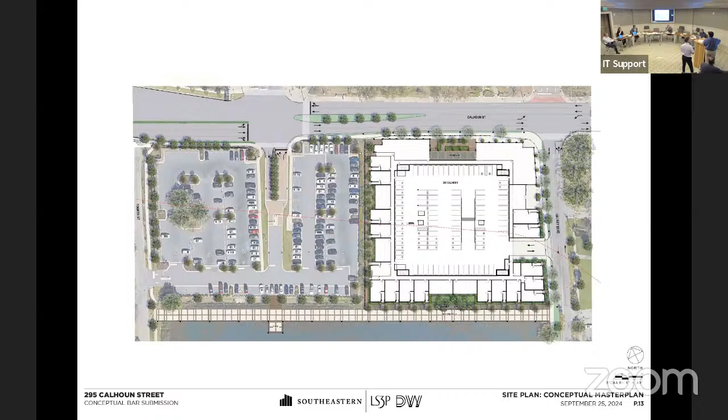We don't know what it is, but for the moment, this is what we're creating in order to be able to have access to those townhomes in a safe way and not just be on the parking. There's also a different elevation between the parking and those townhomes, so we need to deal with that difference in elevation.

This is a close-up of the space, and you can see those hyphens starting to look on the ground floor. On the north side, you can see that terrace coming to the ground floor, and on the south side the gardens, with some small gardens on the left and right. It's kind of the continuation of the hyphen from the upper level to the ground level.

I'm going to step back one quick second just to point out an important line. That red dashed line there is the LiMWA line. So everything south of that has to be raised, with breakaway material below BFE. Anything to the north could be at grade.

Here's a first look, and Brad put out a model that we constructed of this corner, the Calhoun Halsey corner, that you'll see in a second, just to show you the level of detail and effort that we went into studying these facades. This view is standing across, in front of Roper, looking back at the building. You start to see how we articulate the tripartite concept: the strong base, the really simplified middle brick building, and then the upper mass, which is your metal.

You can see how the gardens, like Christoph mentioned, the terrace between the two buildings kind of wraps up the building and into the raised terrace beyond. You can see the back wall, though I don't think I have a laser on this, but the back wall of that recess is about 120 feet from the street of Calhoun.

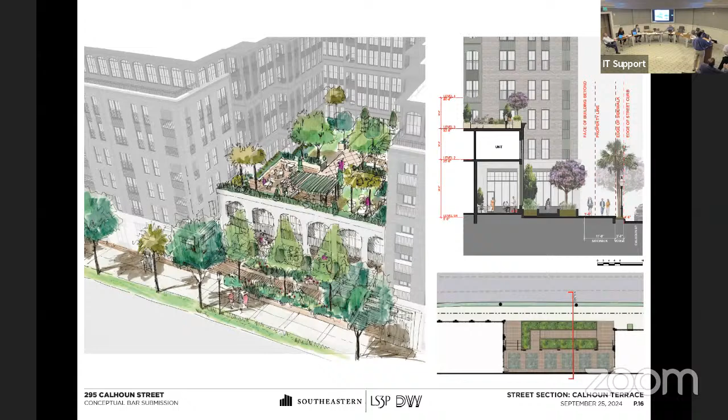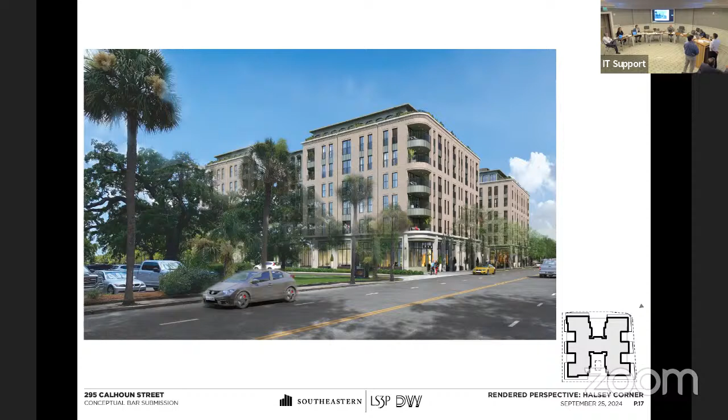As we start moving around towards Halsey Street here, you can see that outside corner. This is our main prominent entry for the residents at this corner, so we wanted to play it up a bit more. We curved the corner to soften it and genuflect to the curve that it's located on. The recessed space for the entry is protected, and we bring down the metal through the recessed balconies on that corner as well to give it a little heightened detailing.

As you step closer, the base we're conceiving of as precast concrete. If we can go that route, it would probably have some exposed aggregate, bringing in the brick colors of our building and the surrounding context, with a nicely defined base below the storefronts. Could be granite itself. These are actually built so that you can engage with them - the pedestrian can start to sit on its little seat ledge there so they can start engaging with our building.

As we move around again, on Halsey here, you start to see how the retail space on the ground floor starts to morph into the townhomes. These townhomes are 2-story, raised up just a bit to get all the flood wall line requirements. They are projected out so they start to bring down the scale for the pedestrian as you come along Halsey, and really start to genuflect to the neighborhood and the Halsey Boulevard townhomes themselves.

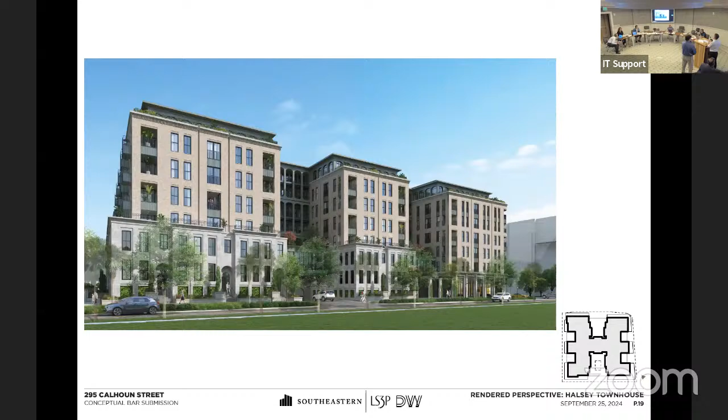The middle is specifically simple - the brick is simple in the detailing and design. We do anticipate deep set windows, some simple brick headers, and a defined cornice on that brick element to really play up the verticality as you see the reveals there. Then the metal work at the top starts to bleed down into these recessed hyphens. Those hyphens between each of the fingers are about 60 to 70 feet away from Halsey, so it's a really deep recess there, which really allows the individual buildings themselves to read, so it doesn't read like one large mass.

And what we're trying to do with the landscape is follow the philosophy of the building. What I like about this project is we're not dealing with an apartment complex with no doors. What you're creating is basically a typical Charleston streetscape of townhomes and single homes with small stoops, little gardens in front. We're trying to recreate what is so well known in Charleston - the experience of walking down a residential street. So you're going from the retail facade with direct access, where people can touch the glass, to something more set back from the facade.

So on the section, you can see what we did also in order to avoid having a base too high. For example, we could have put like 15 stairs. But if you look at the example of the Halsey townhomes right down the street, what they have is 4 steps outside and 8 steps inside - you see that all over the place on most of the porches when you go into the house. So it allows you to have a finished floor at elevation 15, but from the street it's only 4 steps. It looks like the floor is lower, but it gives you a much friendlier and better relationship from the street level. It's not too high, it's not too low, you're not at ground.

So I really like this relationship, and it's really typical of Charleston - the idea of a small green space in front, about 5 or 6 feet wide, with an 8-foot sidewalk. So we're basically recreating a typical Charleston landscape all the way down those townhomes. Even though we have that difficulty of raising them in some sections, we talk about collapsible elements - those green rectangles you see will actually be collapsible when needed, on the southern part of the complex. Again, you can see those amenities on the upper level - the idea is those are going to be kind of private gardens for those units, very green and very planted.

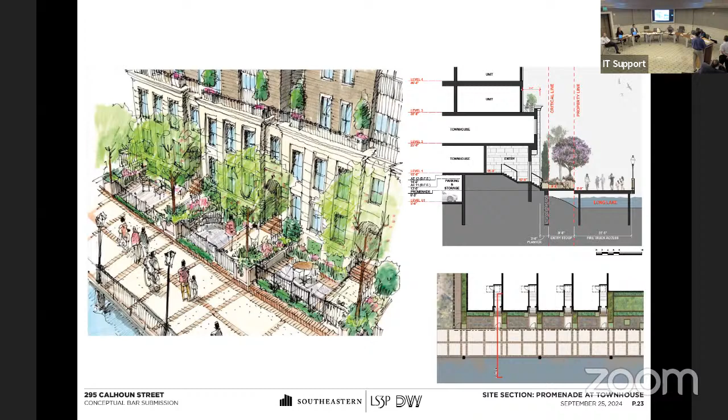Another thing we mentioned is the balconies on top actually get wider on the sides as you go down the street, so it's really getting more and more about the townhomes and less about the big building. You're going to experience most of this building on the ground level, walking around it. Everything between the landscape and architecture is meant to really make you feel like you are walking into a Charleston streetscape.

And then as a larger element, you can see the recess, the idea that will be the southern oriented open space, which could be the pool and more of a daytime sunny area of the design. But again, with that green metal coming down, the whole idea is to put more trees, more landscapes at the base. We didn't want to pave the whole thing - we turn that into a garden that could be open to the public or private at the same time, a central gathering space for people in a formal or informal Charleston type of garden with a fountain and other elements. So the idea is that landscape coming down to the ground and making a moment as you walk down those private gardens into a larger public space.

And then here's the view from essentially standing on the dock that's existing there across Long Lake. You start to see how that facade gets broken down by those additional hyphens and a really deep recessed pool terrace.

And the last part of the landscapes is the west facade, which basically is a facade - normally you could see the parking lot right on the side of it. So the idea is we have basically an alleyway that goes from 10 feet to 20 feet because of the recess of the facade. The beauty of it is you have 3 buildings, basically with a recess of gardens.

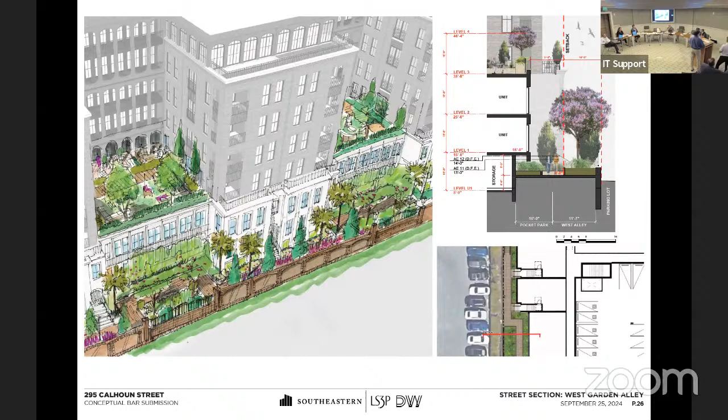So we're following the same philosophy of the green space on the ground floor, and also using that to jog the path rather than having a long straight path all the way down the alleyway. The wall along the property for privacy and retaining the site will also change in nature. It could go from brick to ironwork to full brick and stucco as we go down the building, to break down that long facade into 3 items with gardens in between them.

Here's the view coming into town, walking basically in front of MUSC Children's, heading towards Roper in our 295 project. Again you start to see the fingers themselves being really expressed, the vertical massing, the separation of the long facade down into multiple buildings. An additional hyphen has been added right between the townhomes, where those end and where the retail starts again, and that's where the break in the garden will happen.

This corner is a mid-block corner, so we didn't feel it needed to be treated the same way as the Halsey Calhoun corner, so we did not curve this corner. It felt like it needed its own expression, so it's squared off with a nice recessed balcony in that corner. And then one last view as you're entering town from the James Island Connector.

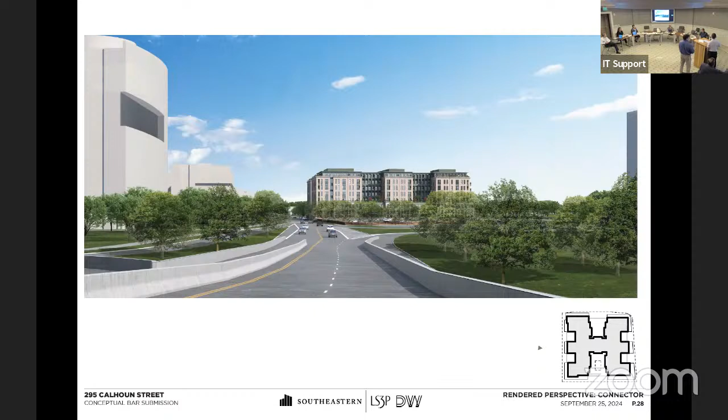This is the view I would see every day coming into town, and then you really start to read those hyphens really well. It separates the building, I think, during most of the day, so it's going to really feel like 3 distinct buildings.

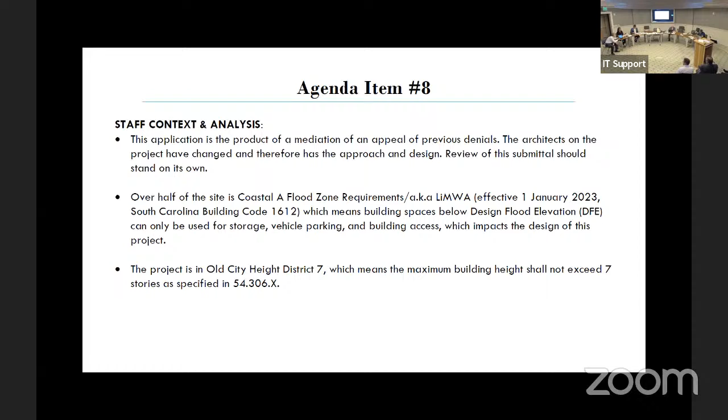As previously noted by the applicant, over half the site is in LiMWA, meaning building spaces below design flood elevation can only be used for storage, vehicle parking, and building access, which impacts the design of this project. Finally, the project is in the Old City Height District 7, meaning the maximum building height allowed shall not exceed 7 stories. Staff support the proposed massing form, which steps back multiple times and includes carved out portions that applicants describe as back-to-back E's.

Jeffrey knows I think of it as a fancy H. The step backs and carve outs reduce what could be an imposing full block massing and allow the Long Lake side to respond to the lower residential massing of neighboring Harleston Village. Having the 7th floor setback also reduces the perception of the height, scale and mass allowed by zoning.

Staff support the architectural direction of the proposal, which uses elevated materials wisely deployed to provide additional breaking down of the form by establishing a material distinction between base, middle, and top. Having the center hyphen form read differently materially from the rest of the masonry middle, with increased glazing and metalwork, reduces the appearance of the mass. The same glazing and metalwork strategy also lessens the impact of the top floor.

The applicant's approach to site work and LiMWA is to be commended. The use of landscape and hardscape responds to the context and dimensions on each side and supports a convivial public realm while still providing a clear transition to the private realm on the 3 residential sides of the block.

The site section along Halsey Boulevard, from car lane to townhouse interior, skillfully deals with necessary increases in elevation due to LiMWA while not compromising the pedestrian experience. The same is true on the Long Lake section, which transitions deftly from promenade to public path to private garden and townhouse interior. Moving a significant amount of the stair run interior to the townhouses also allows the public reading of the facade to be commensurate with a regular stoop configuration.